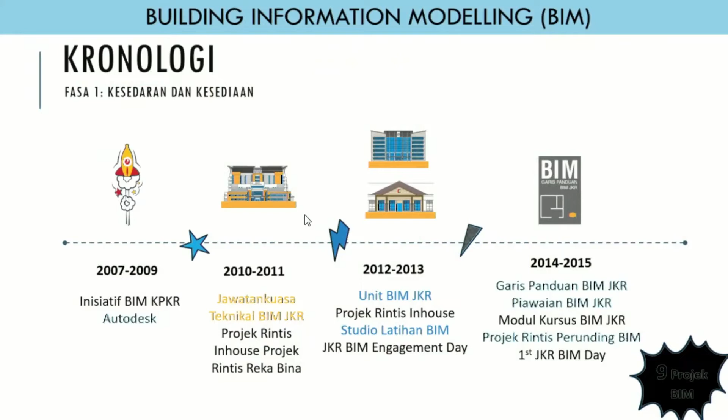So we had a lot of lessons learned in those projects, and from there we came out with our first BIM guideline and BIM standard at JKR, which we already use in all of our JKR projects. And then the next one we call Phase 2.

Phase 1 is actually our awareness and readiness, how we want to implement BIM in JKR projects. For Phase 2, we focus on development and implementation in terms of the process, and then in terms of our people and technology.

So we managed to publish our work process in BIM, and then we developed our competency development for our staff in JKR.

We put our KPI in our JKR strategic plan 2016 until 2020, targeting to achieve 10% for projects worth 50 million and above for building projects. So we targeted and we already achieved 20% for that KPI. So we see that BIM can be done.

So actually BIM can be done if the government pushes the industry. So by 2020 we came up with our policy in BIM, and we have our Surat Arahan KPKR bilangan 18/2020, that we want to implement BIM in all our JKR projects worth 10 million and above.

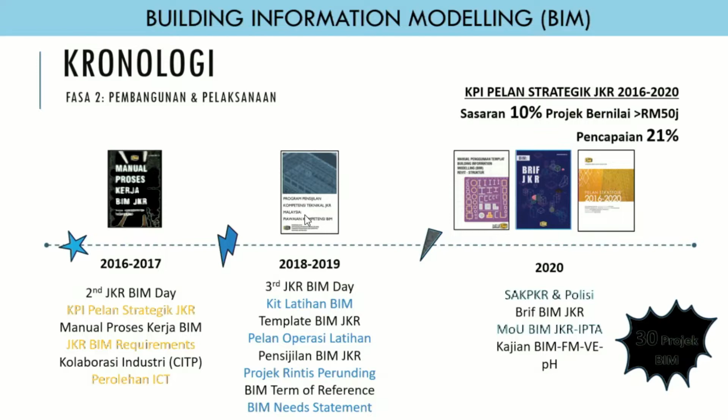For Phase 3, 2021 until 2025, we want to move in and expand BIM use into GIS, prefab and modular coordination such as PPVC, IBS, and then facility management, and sustainability. So we see that starting from BIM, we can move to other technology that can be used during the whole life cycle of our projects.

So until now we have around 85 projects in RMK 12, and there will be more projects that will use BIM in our projects.

So for 2021 until 2025, we targeted 50% of projects worth 10 million and above to use BIM for all JKR projects, and every year we will increment by 10% each year. So that by 2026, all of our projects worth 10 million and above, JKR will use BIM fully. So that's our journey, from non-BIM to BIM.

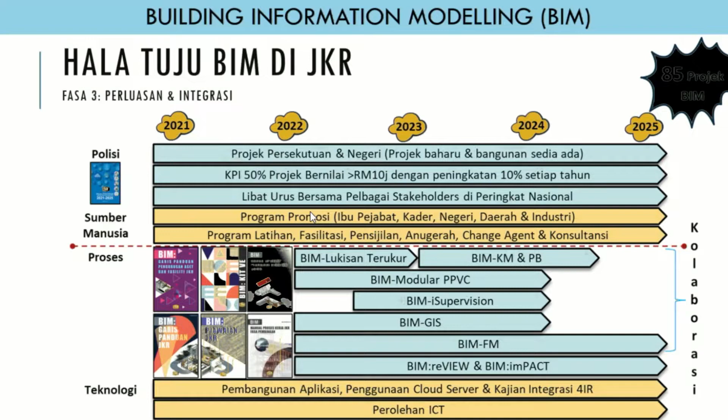We try to bring the technologies such as BIM, FM and so on into our pengurusan aset project and pengurusan aset juga, okay.

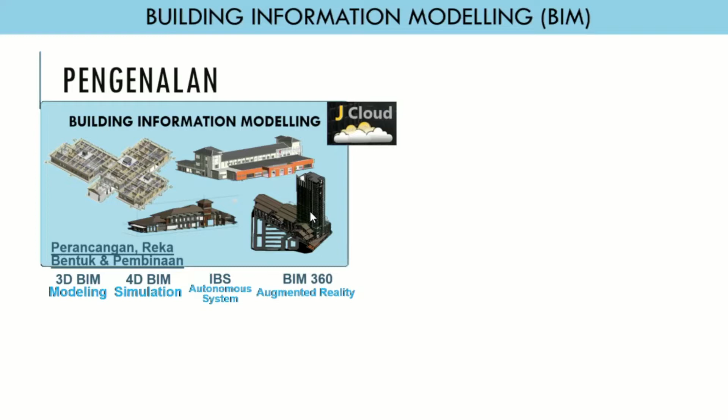So if we talk about BIM, we need to have a sharing platform. In JKR we have JCloud, to share all the data, all the models, to the designers, consultants, and contractors, so that they can share in one platform, one source. So they can coordinate and collaborate with each other by using this platform.

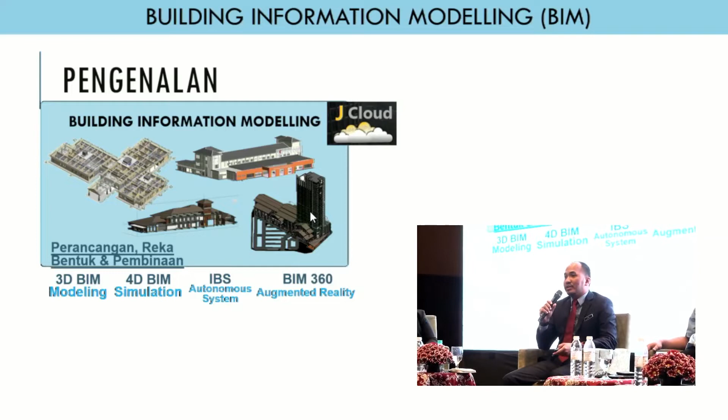After that, all this model we hand over to our clients. So the clients can get the BIM models into our eCOMs. We have another platform that puts all our repository data, where we have all the as-built model, as-built data that the client can get from there.

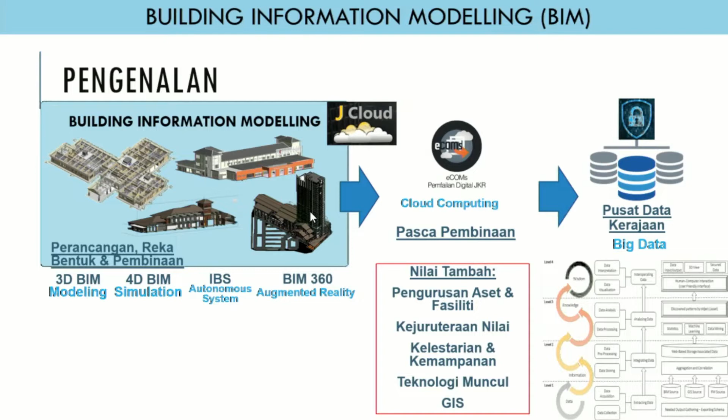So actually BIM can give added value in terms of pengurusan aset, facility, value engineering, sustainability, and emerging technologies and GIS. Actually, BIM can accelerate the adaptation of technology 4.0 because it can improve the work process, it can increase the productivity, and also that can be used for sustainability analysis, amalan hijau, alright.

So JKR from 2020, as I mentioned, we have come up with our policy. Actually JKR is a pioneer to adapt BIM in Malaysia, so that all the industry players can support us if they are doing our projects in BIM. That's why we come up with our initiative. We put, even though we have Surat Arahan KPKR, we also put our JKR strategic plan.

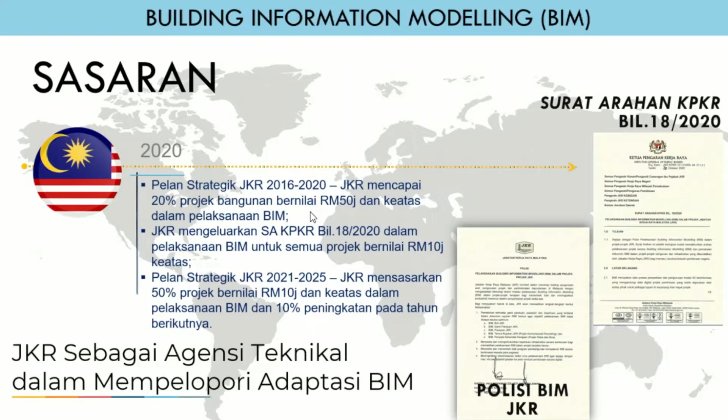So we target, not to implement 100%. We slowly move 50%, 60%, 70% and so on, so that the industry players can catch up on how JKR implements BIM in the projects. Until now we have around more than 120 projects that implement BIM.

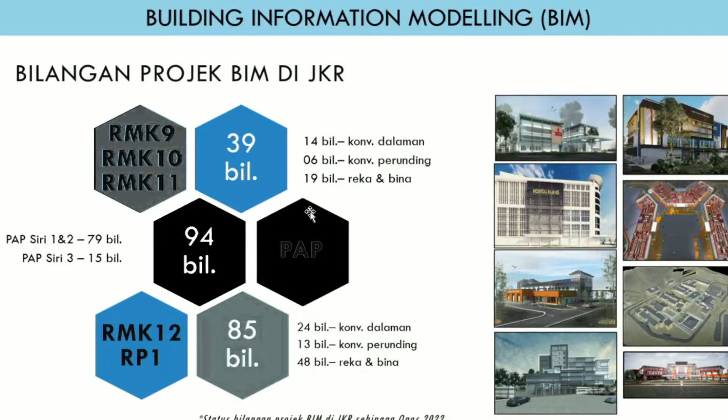We know that when we use BIM, it can help a lot in terms of reducing clashes, increasing collaboration between parties, increasing communications among parties, and giving the best decisions, especially for the client and the designers to come out with the design.

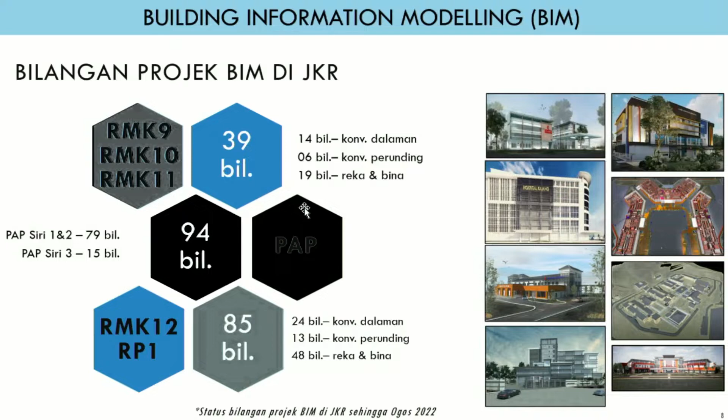And then when we talk about BIM, there are three focus areas that we focus on. The first one is process. We need to develop the work process, the BIM reference documents, so that it can be referenced by the contractors, consultants, and others.

And the second one is technology. Actually the technology is another part that is important that we need to upgrade. We need to invest, to make sure that when we talk about BIM, we need to invest to change the way we work by using the BIM software - that is one example. And then also the ICT also we need to upgrade, so that when we want to share data and models between each other, it can be smooth.

In our work process, and the last one is people. People - actually we need to develop the competency. In JKR we managed to develop our own competency, and not forgetting the contractors and consultants that use BIM - we will try to help them by implementing BIM engagement in the projects.

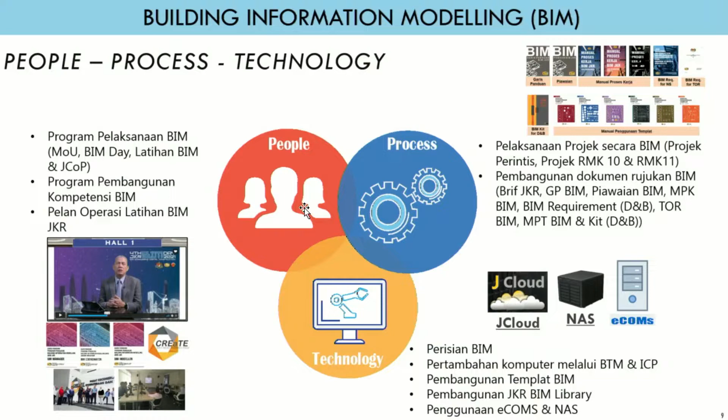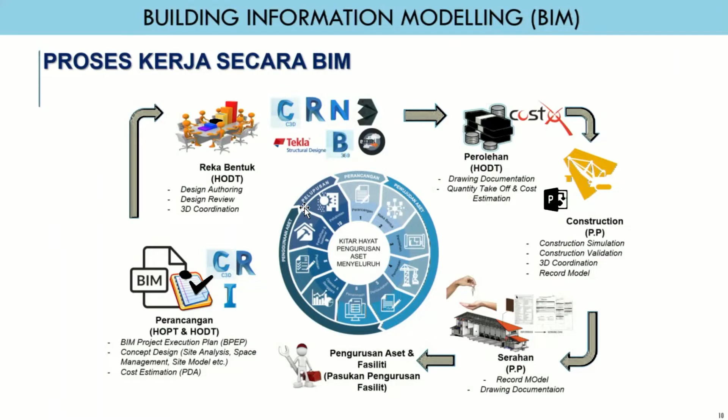So after that, we need to make sure that when we want to adapt BIM, the environment needs to change. Before this we are using only 2D drawings, but when we talk about BIM, we need to change the way we work. We need to have a laptop, a projector or television, so that we can coordinate and communicate with each other, so that we can improve the way we talk and discuss among the clients, designers, and the contractors.

So actually, the design, we build the model, and then the consultant will discuss each other's work. And also in construction, we bring the models onto our tablet. We can validate the construction, and also for the clients, they can see 3D visualizations so that they can comment on it, and then the designer can improve the design from the client's perspective. So this is another example of how we want to share the model.

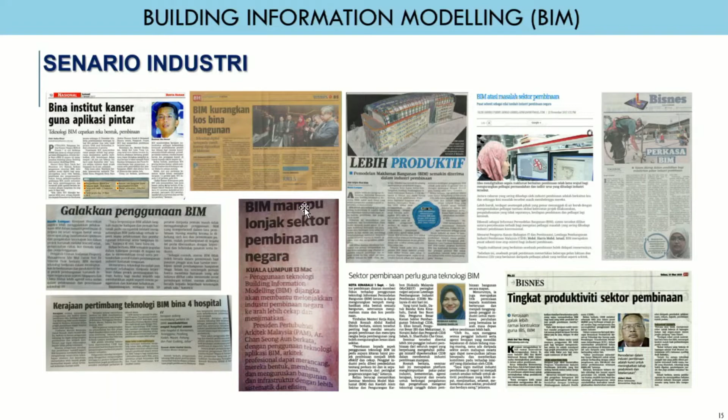What about the world? So actually all around the world BIM is already implemented. If you look at developed and developing countries, BIM is already implemented, especially our neighbor Singapore, who already implemented BIM by 2012 if I'm not mistaken.

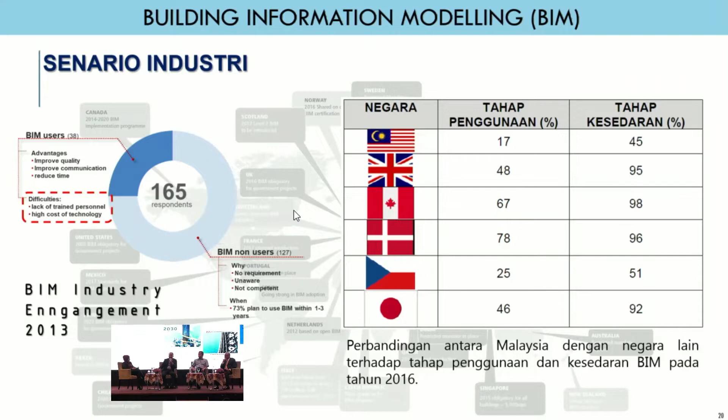One of them is building information modeling. So we know that if we use BIM in our project, it can actually increase productivity.

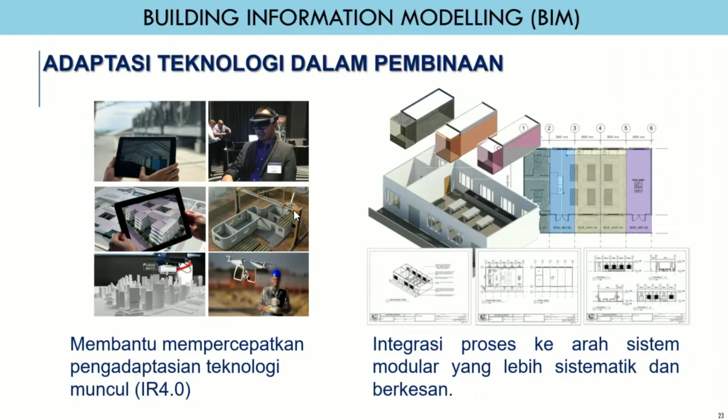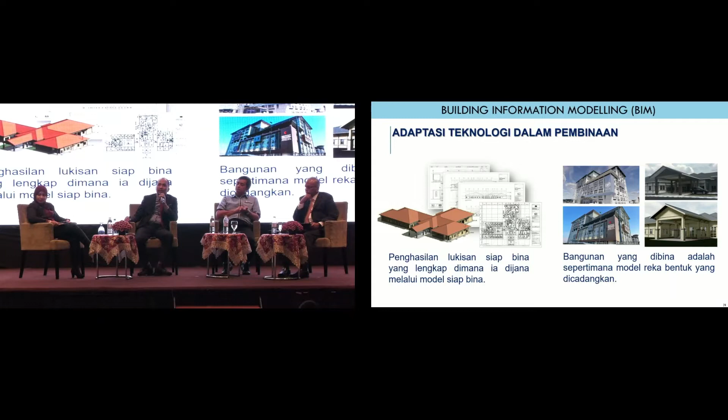When you develop BIM models, we put in all the information for energy efficiency, so we can help analyze the level of energy efficiency. For example, in Malaysia we use MyCREST or JKR's PH JKR, and within that we can get points for using BIM in sustainability analysis.

Other than that, this is the core reason why JKR and the government use BIM in our projects. We want to help register all the immovable assets digitally, because previously it was manual and now we don't want that anymore.

That's why the ultimate goal of using BIM is to have asset information so that our clients can manage all the assets during the operation and maintenance phase.

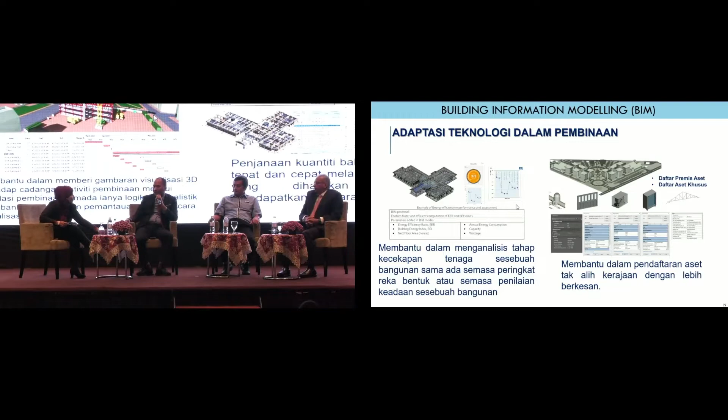In terms of construction, contractors can visualize, combining the 4D with the work program and the 3D model, so they can get activity sequencing during the project. We can also generate the quantities.

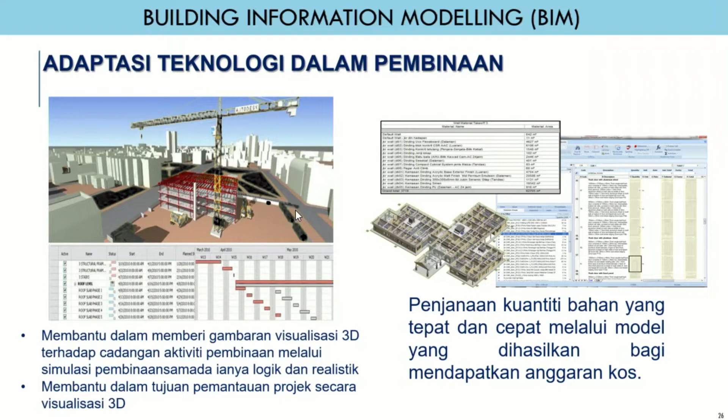So here are some examples of how we work and how we want to present. The first video shows us using Google Meet to discuss with our clients during the pandemic, where we have the models and can discuss among us. The second is the 4D and 5D, where we can look at the sequence of the projects, and the third video shows discussions between the SO, contractors, and consultant during the construction stage.

The fourth video is for VR and AR, which we can actually do, so the client can see things more clearly. We can also upload into our tablet to validate or put in an RFI, so we can get information during the construction stage. So this is how we want to change the way we work in JKR, among our designers, consultants, and contractors.

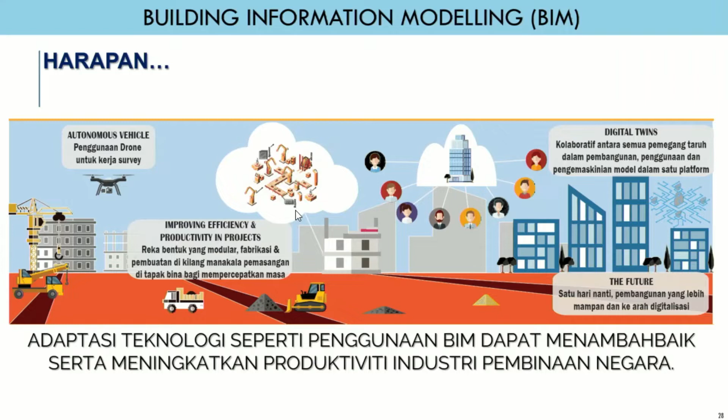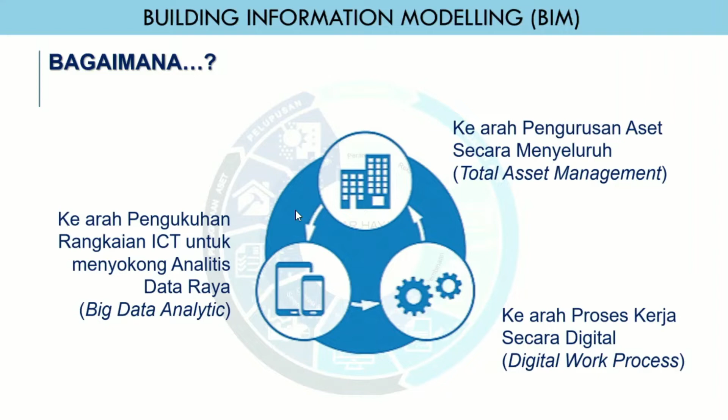Okay, we want to move to level 3. Right now we are in level 2 actually. So if we want level 3, we need to have a seamless process, and all of us need to use the technology. So that's I hope that from my presentation, it can give you all some glimpse of adapting technology, by using BIM in the projects, so that we can increase the productivity in our industry, construction industry. So there are 3 main things. We need to go into total asset management, digital work process, and big data analytics. So that's from me.

Thank you so much, Engineer Faiz, for very insightful information. Maybe I think industry would like to know what actually JKR Unit BIM can serve them. Looking into the whole initiative, how actually JKR can help industry perhaps, because you do have lots of projects, lot of involvement. So maybe you can share a bit, sir?

In terms of initiative, actually in our plan strategy JKR 2021-2025, one of our initiatives is to implement BIM. 50% of projects worth 10 million and above. So that is the first one. So that when the contractor or consultant does the project for JKR, they need to use BIM. So that is the first initiative.

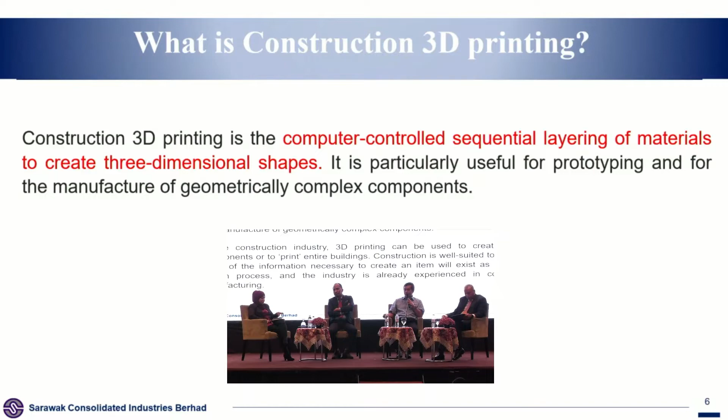So in construction industry, 3D printing can be used to create so many types of structures. It is unlimited, whatever shape you can think of, especially architects, they are very innovative and have interesting ideas, because being so many years as engineers dealing with architects, they have so many crazy ideas that we engineers have to suit. So now we have a solution. Even as contractors, we can suit the needs of architects, especially because architects would like to have beautiful structures, not a dull structure. So 3D printing is one way where we can help make that a reality.

And at the same time, as contractors or even as developers of the machine, we also look into costs. So cost always goes hand in hand with the design. That's why I always say, are we ready, before we come to the conclusion to buy this machine.

We did quite a bit of research before the pandemic. Actually right before the pandemic, I still remember we went to China, in 2019, to look at the 3D machine. At first we went to China, then we went to Europe, to compare the 3D printing machines.

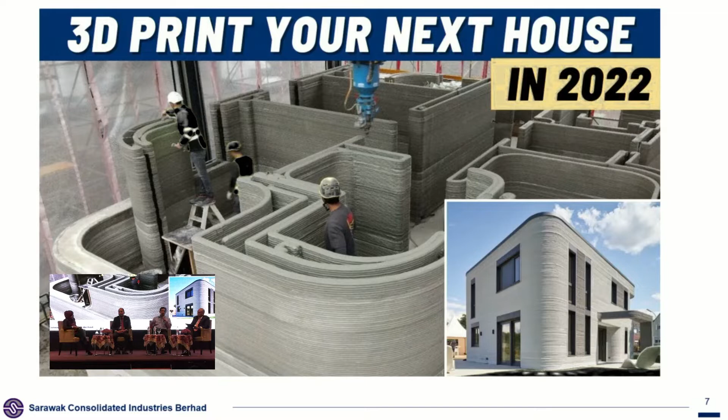So are we ready for 3D printing in 2022? We started to look at the machine and started to buy in 2021. And from there we do our own research on so many things. So later on, I will share with you in detail.

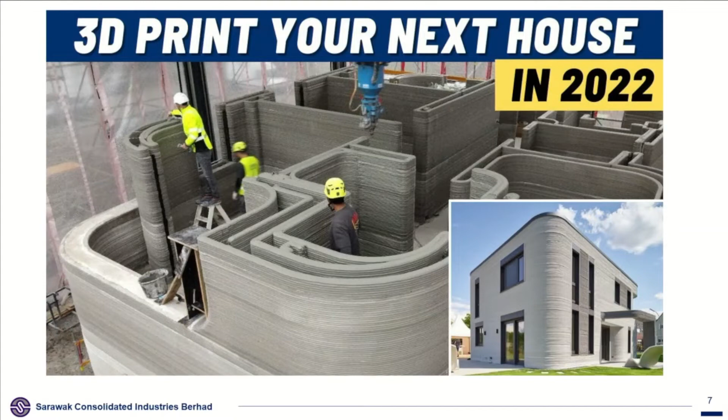The innovation in 3D technology is actually like our own printer that you use every day in your office, in your schools - 3D printing. I know architects have 3D printers, we call it 3D printer, small one, not the big one. So in construction, we are talking about 3D printing of big scale. Normally, architects when they do design print, their design is 1 to 10 scale or 1 to 100. But for us contractors, developers or builders, when we build using 3D printing, we are building 1 to 1 scale - meaning we are building the actual size of the building, not using pen or ink, but using concrete. So that's what we call 3D printing in the construction industry.

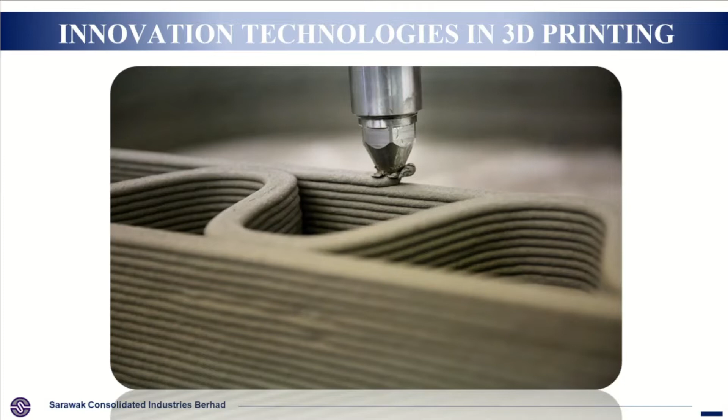So the machine that we bought, finally we decided to choose the Cobod machine, 3D printing machine from Denmark.

This 3D printing actually started in Europe, and one of the pioneers is found in Copenhagen, Denmark - a very nice country. They founded the company in 2017. This Cobod is a globally leading company who champion 3D printing technologies, and it is funded by the government of Denmark.

So from there, they started with 35 3D constructions using the first model, that is BOD1. Upon that construction, they researched and made many tweaks in improving the machine, and that's where they came up with this second generation machine, which we call BOD2. So BOD2 is where we, SCIB, Sarawak Consolidated Industries, decided to purchase one to do our own 3D printing here in Malaysia. It's newly upgraded and much improved from the earlier version of BOD1.

Okay, so if you can see in the slide there, these two photos - actually 3D printing is a very simple structure, but the technology is in the software itself and also the materials.

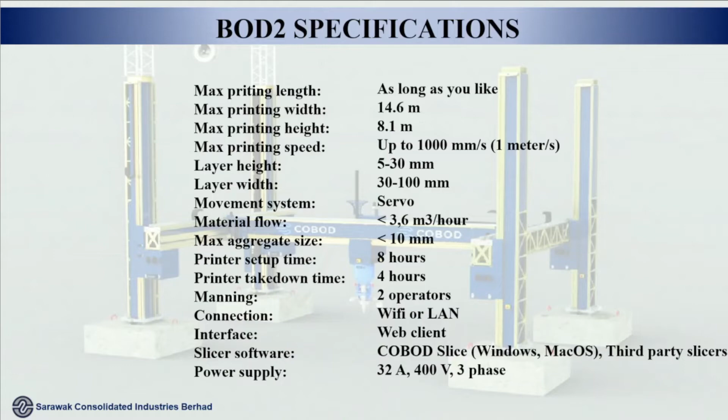The layer height of the material is actually a module, it can be adjusted depending on the design and also the design mix - I won't go into so much detail there. But the most important thing is that the software we use is a slicer software. This is the technology we learn when we operate the 3D printing machine.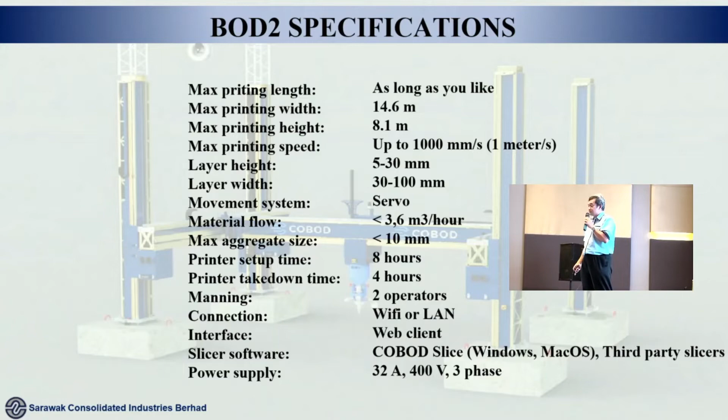The innovation of this technology is that they're using a gantry arm extrusion system as the printer, where they can control the printing from all the inputs that you design, because it all starts from your design office. You can use any design software - AutoCAD, Revit, whatever architects use, any software. The output of this software is input into the machine, where we have software that computes the slicing of the house. Imagine it's like making Sarawak cake lapis - you know that cake, there's a lot of small layers. Likewise, when you design a house, the software will compute all the slicing.

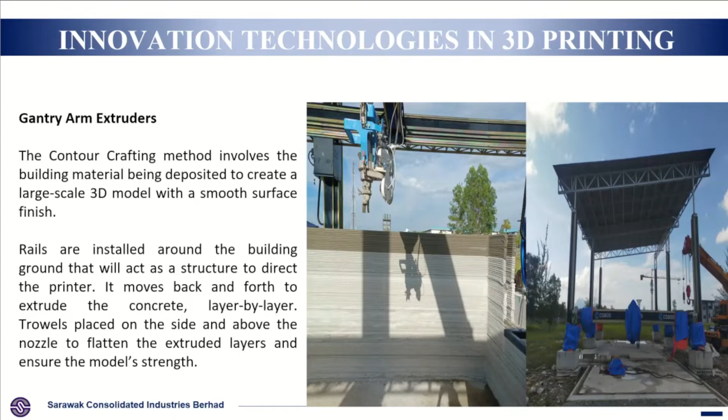So the printer will print upon the slicing, and you'll understand more when I show you the video. The precision of this 3D printing is absolute, meaning it can print layer by layer upon every millimeter. So how many slices that can be generated is how many printing lines it will generate to form the completed structure from ground zero to the finishing level of the intended structure.

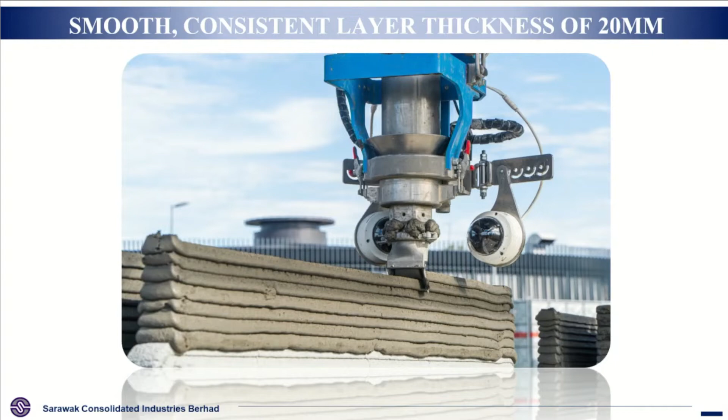We are using Cobod slicing software, and because it's technology 4.0, I call it now, the concrete is extruded by this beautiful printing head. For every printer, the most expensive part is the ink, the printer head. So this is our printer head for the Cobod machine. It's a printer that extrudes the amount of concrete, or in this case structural mortar, to form the structural building of the houses.

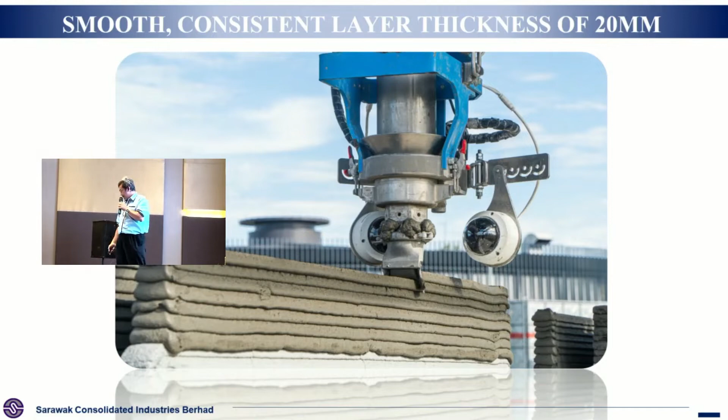Setting up this machine is actually very simple, and in fact, when we bought this machine, the Cobod engineer from Denmark was supposed to fly in, but because of the pandemic, we had to learn virtually. Because of the time difference, we worked at night to learn this machine. It took us about almost two months to familiarize ourselves with the mechanical and electrical parts.

And of course, being a printer, there are a lot of sensors. But when you maintain it properly, any machine's electronic sensors are always the part you have to look after to make sure the machine works perfectly. The maximum setting up time is actually 8 hours to set up the machine.

Now, for a printer, the most important thing is the ink. In our construction 3D printing, our ink is actually the design mix. It took us almost 3 months to understand a suitable design mix for our local raw materials. Even though the material is simple, cement or sand, there's a certain design mix you have to develop, because mind you, there's no standard for how to generate this design mix.

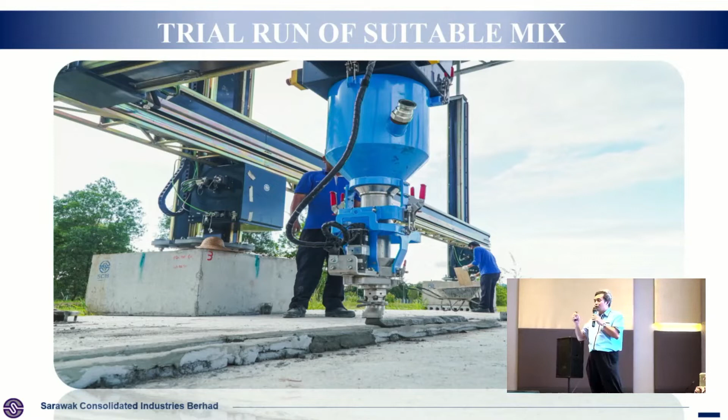It's not like a normal concrete where you have a 1 to 2, 4 or 1 to 2, 2 dry mix. For this, the trick of this mortar mix is it has to harden quickly, but not too quick and not too slow, so that we can sustain the thickness and the height of the material.

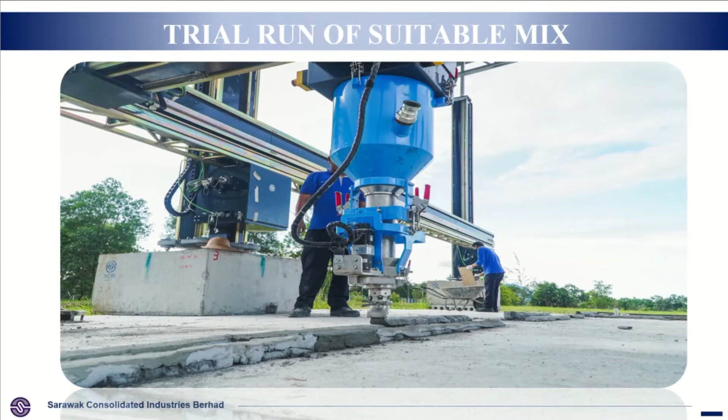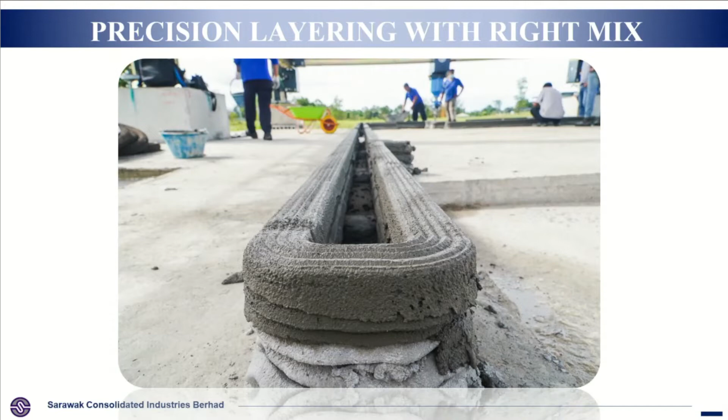Once you get the correct design mix, the printing is very precise. If you design the width of the printer line, I call it the slicing line, the standard width is about 50 to 65 mm. So the nozzle is extruding a minimum of 50 mm to 65 mm wide of concrete mix continuously, so you can have a very beautiful profile.

This profile is actually to create the shear interaction. Those of you who are structural engineers know the importance of this shear interaction to have a strong and stable wall when we print.

So an important aspect of the material is that it has to be a fast-setting design, enabling the concrete to be printed at high wall thickness and high wall height. The design mix has to be perfect, which is why it took us 3 months to study it. We learned this design mix together with our local concrete industry, and once launched, we are now sitting together with CIDB CREAM, the research body, to form a standard for 3D printing in Malaysia, so that everyone follows the same standard which complies with our local building authority.

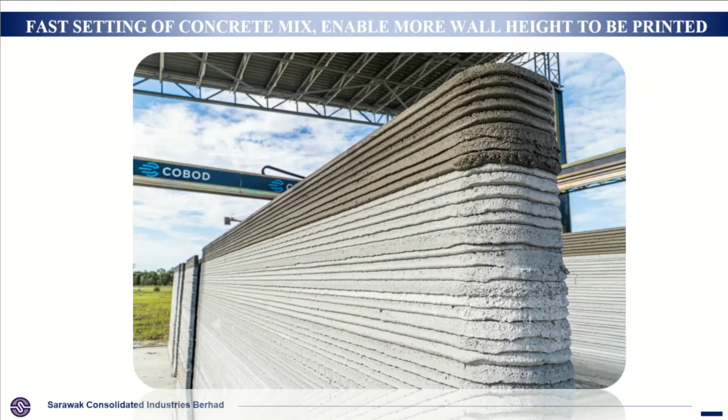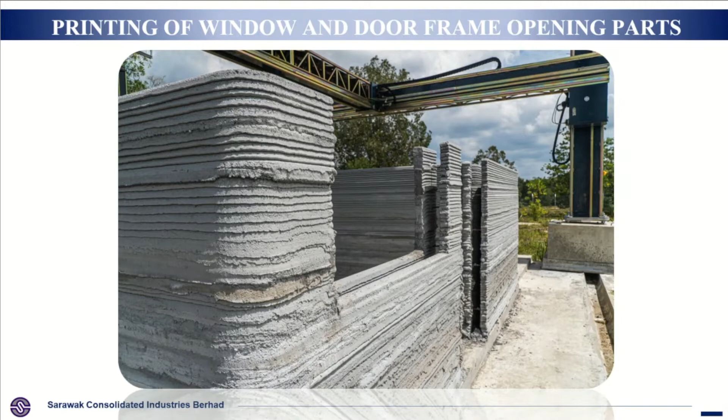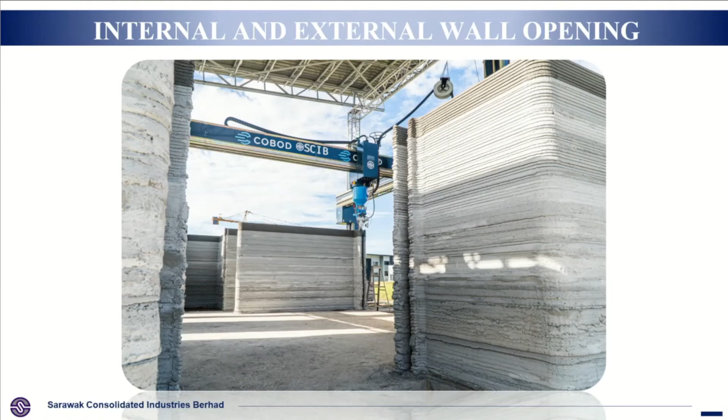This printing can even print all the structures of the houses, especially openings for doors and windows. These are all photos we took where we actually printed the actual building from ground to finish. You can see a big door opening, and even the lintel, the opening of the window lintel or door lintel, can be printed. But of course, when you have a lintel, we have to do formwork to form it.

So the lintel is also using extrusion 3D printing. In these houses, when you use 3D printing, there's no formwork involved, only formwork to do the lintel.

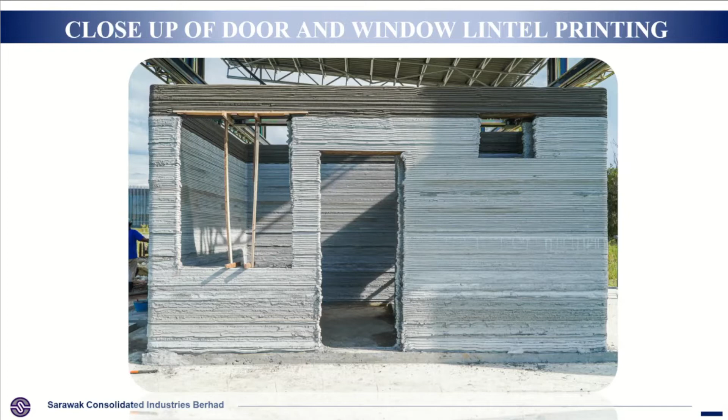Okay, so this is another photo to show how you actually prop the opening of the window or door. So there's no limitation of size. Whatever you design in your building, the opening, or even your M&E, is all precisely located. So whatever you input in your design, where's the location of your opening, conduit, power box, services, is all captured. And the printer, once you input the data to print, you print everything precisely. You only need to put the socket box.

Or even on your left, you can see M&E. You know the conventional type, when we do M&E, we always grind and cut the wall. So in this process, there's no cutting. You only install the piping on it. This goes the same with plumbing, your water.

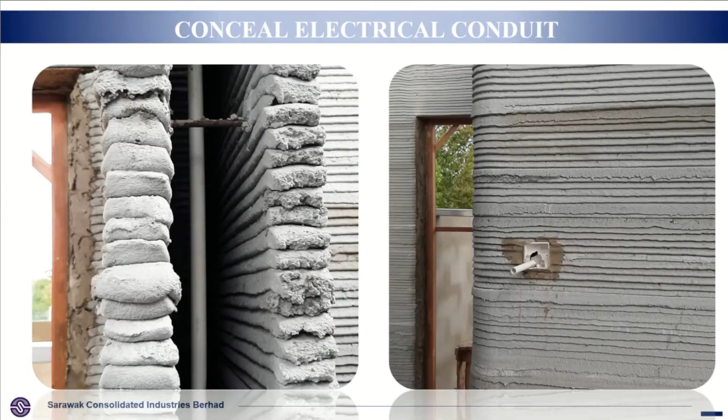So in 2 days we can print. This is the actual site. The location of this site is in CIDB Sarawak, one of just nearby the convention center. So in 2 days we can print about 1 meter high of wall height.

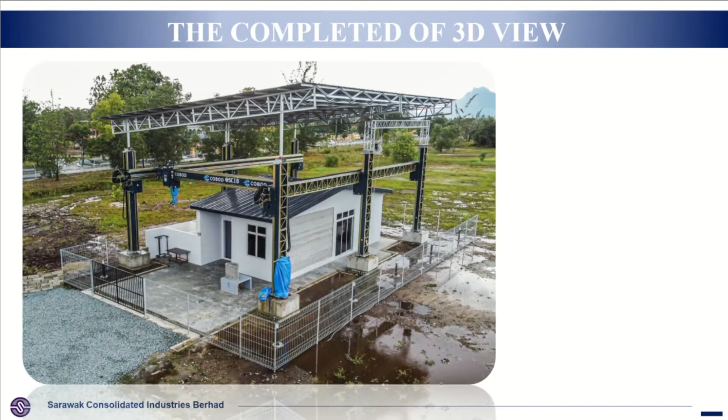So the completed 3D view, this is upon completion. A summary of the printing: there are total 145 layers of materials, where each layer is about 20 mm. So the total print of this house is 46 hours, with a total length printed of 9,196 meters, about 9 kilometers, with maximum 20 layers per day printing. The average mortar strength, structural mortar strength at 28 days, is about 25 MPa average, and it can go as high as 30.

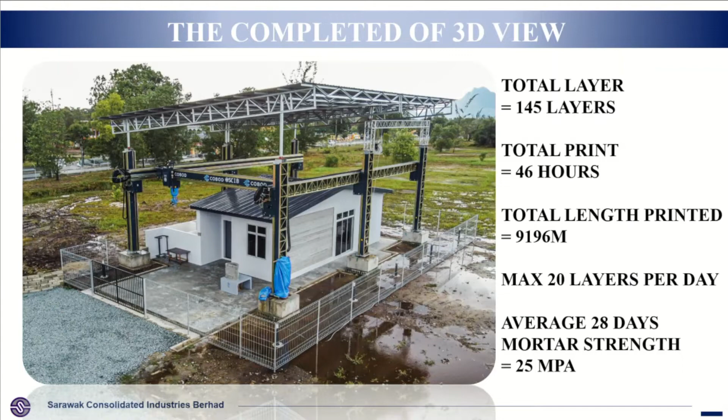Okay, so what is the benefit of this 3D printing construction? What I can summarize is it's efficient because maximum printing speed is 1 meter per second, and the machine produces less waste, there's no wastage. Whatever you input into the machine is translated into your product. Also, 3D printers can finish a home structure in less than a few days.

Like for instance, this 46 hours of printing, of course it's not continuous. The actual 46 hours is actually translated into close to 14 days, because every day we don't print from morning until night, because we are actually studying. But if we really want to print continuously, maybe it will take about 3 days to complete everything.

Okay, and also it reduces the labor costs. Why? Because only 2 operators are needed to operate this machine for construction. Construction with 3D printing may allow faster and more accurate construction, especially for complex structures, as well as lowering all the labor costs and producing less waste.

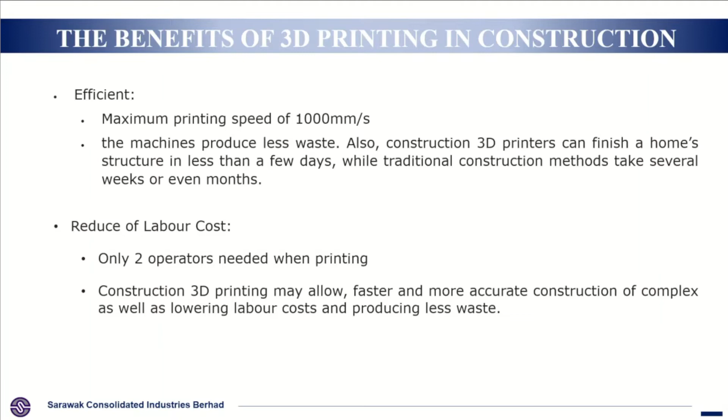Okay, so it reduces construction waste. Why? Because the walls are printed straight. Unlike conventional construction, when you do walls, they're not straight, they're wavy. So once wavy, there's plastering involved, where some part may be thicker, some part may be thinner. But in this case, because it's 3D printing, everything is precise, so it reduces the amount of plastering. In fact, the printing of the wall is so nice, like kek lapis. Some house owners may even like to maintain it without plastering, just plastering the inside of the house because of dust. But externally, it looks like a fair-finished concrete structure, and there's a design to it.

So it can actually also reduce site formwork. In fact, in this construction, we hardly use any formwork. And because of that, it's a much cleaner and safer site to work with.

Okay, and the design is very flexible. In fact, a house normally, when we look at a house, it's normally boxy, square, 90-degree angles. But you can in fact design a house with a curved wall, because printing can be done curved. If we want to do it conventionally, the formwork would have to be curved, and of course that's a cost. But for this, there's no extra cost. The cost is only the machine and the time. That's why it's a faster construction time, and it's proven when we do the actual construction.

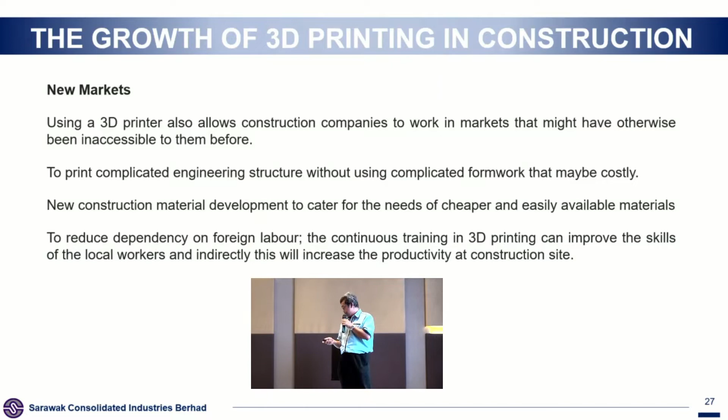And new construction materials will be able to develop. In fact, we are now in the midst of collaborating with universities to come out with a much more efficient construction material, especially for the concrete ink, as I call it. So a better design mix, because I always believe concrete can always be improved. The way we go forward to improve is to reduce the cost of construction and improve durability, and make it easy to control the design mix that reflects our local materials.

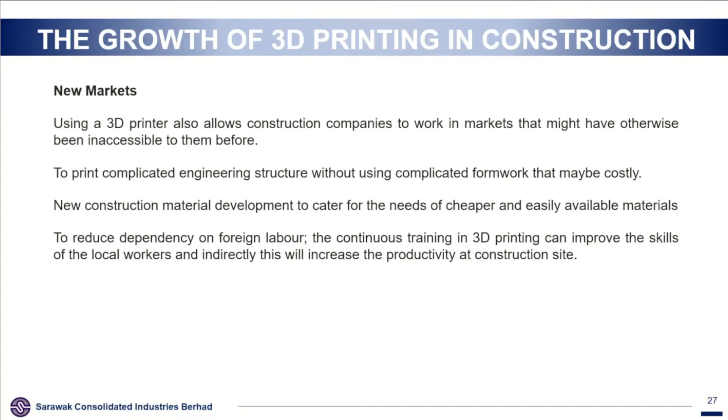And also with 3D printing, because of the experience of the pandemic, we can actually reduce the dependency on foreign workers. Not only foreign workers, but when we have shortages of workers, especially in our construction industry, this 3D printing is one of the ways that can help improve our shortages. In fact, it can help develop more skilled labor to work with this 3D printing, and with that, it can help increase the productivity of construction as opposed to our conventional labor force.

Okay, so I end my slide here with the actual video that we took for the construction of our 3D printing project. So in the first few minutes, you'll see how we set up the machine, and then how the machine prints the structures.

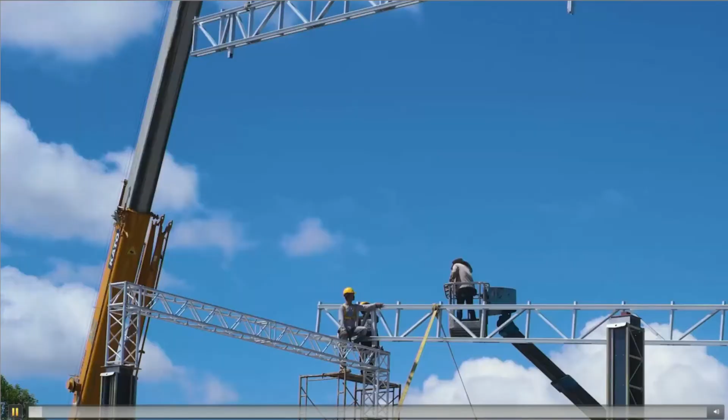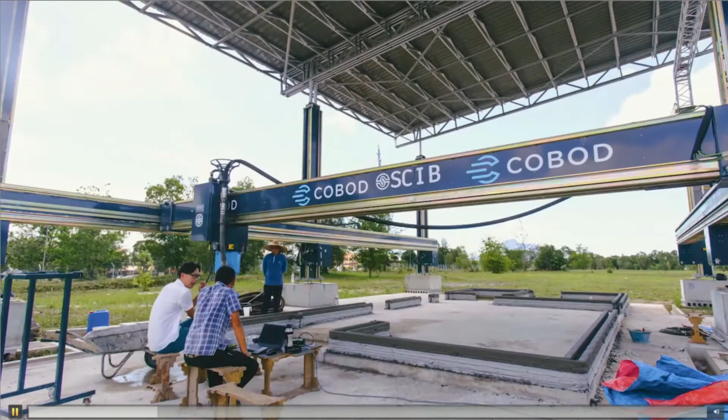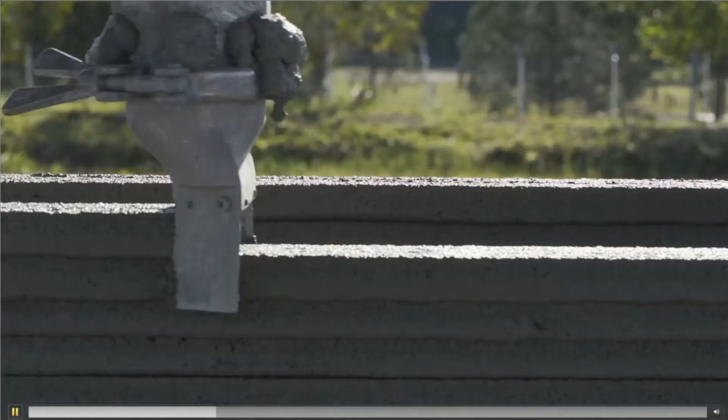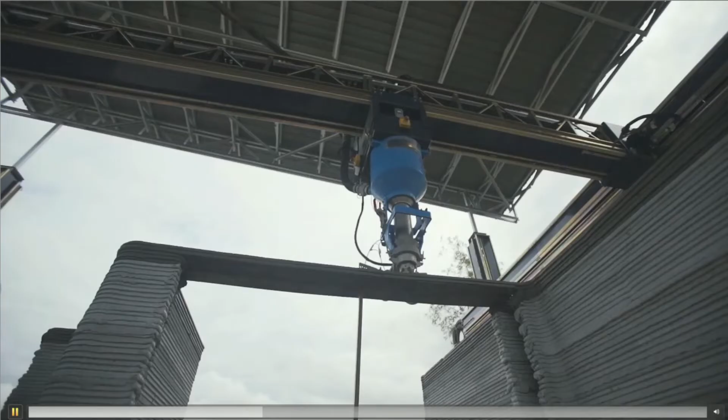The success of this 3D printing very much depends on the design mix, so it took us quite a fair amount of time to learn to perfect it. You can see the uniform extrusion of concrete by the printer, and whenever there's an opening, it knows where to stop, where to turn, and where to go.

Once you press the button, it's automatic print. Once your design is finalized, everything is left to the printer to finish the work. That's how easy it is to print a house. Nothing is impossible. Everything is possible when you do the design properly.

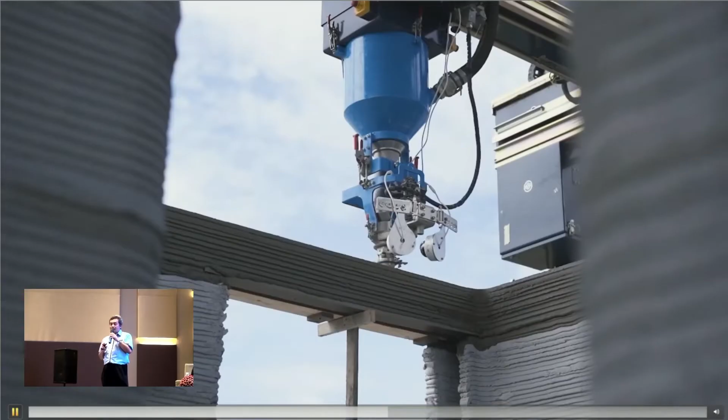And as I mentioned, you can think of any structures, beautiful structures, curved structures, especially curved buildings, or even a dome, can be printed using this 3D printing.

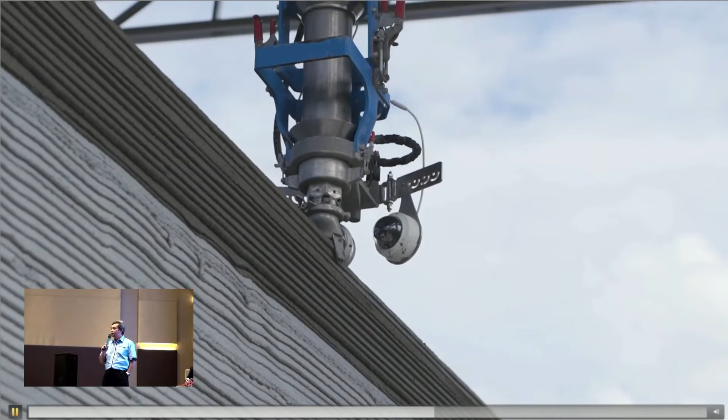We hope to use this for all the houses, especially for affordable housing. Finishing of the building is like many other works. That's why we purposely left some part of the wall unplastered to showcase the beauty of the concrete printing.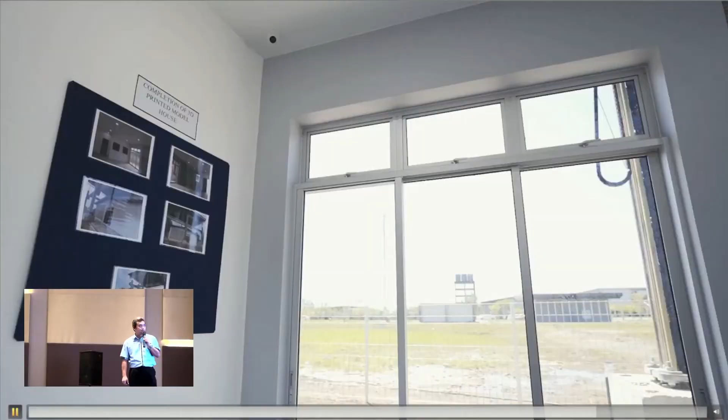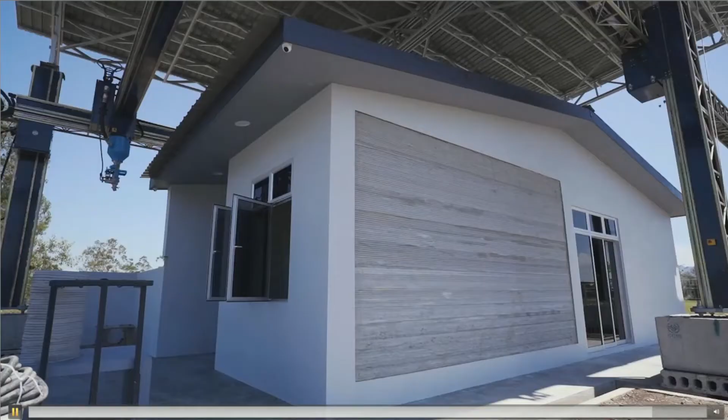It's a 3-bedroom, 2-bathroom house, about 850 square feet, completed in 46 hours. This will help to reduce costs and also help address the shortage of houses in Malaysia.

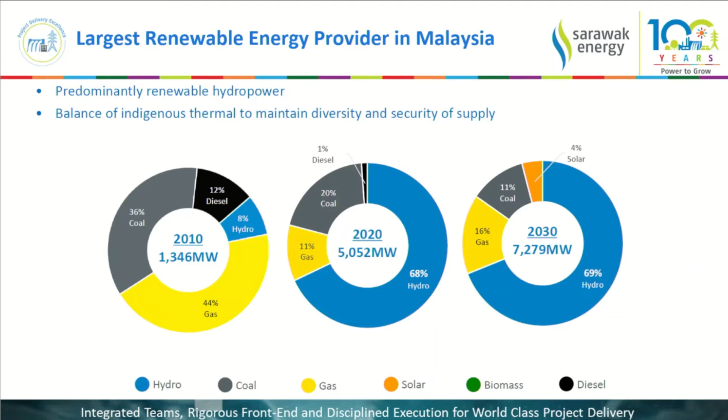I'll now talk about our capital project portfolio. Today we have about 40 billion ringgit worth of projects. It is large by any standard because it is infrastructure development, to be implemented by 2030. About 29 billion of this is generation projects and 11 billion is for transmission projects. Slightly more than half is now in the execution phase, and the remaining is in the front-end design and development phase.

The large size of this capital investment is quite typical for major infrastructure development projects, and it's all the more important that in executing these projects we embrace technologies and best practices to implement them cost-effectively, timely, and safely. From past experience of project execution, we have seen significant cost escalations and delays, which can have very severe negative impact on the development of the state and the rakyat. In our internal analysis of some 50 projects executed between 2010 and 2018, we saw delays averaging about 1.5 years per project, with the worst case delay of up to 6 years, and cost escalation of up to 1 billion ringgit. When you have delays, it's cost.

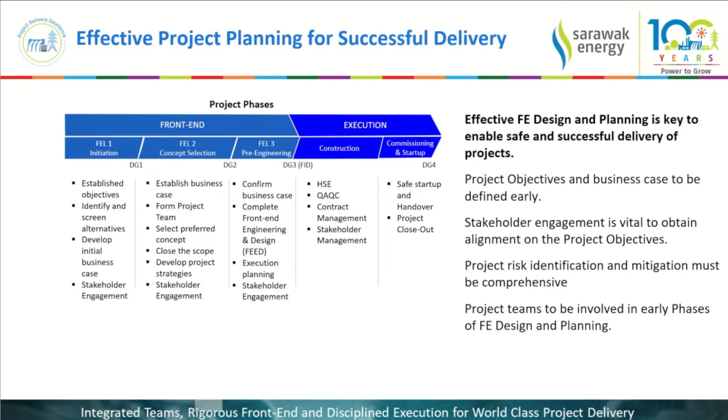For instance, we have transitioned from literally drawing a straight line on a map to using topographical maps and cadastral maps to aid in determining optimal line routes that are technically less challenging, and that also help minimize disruptions due to disputes by land claimants.

It's a simple thing - when you draw a straight line on a piece of land, you cut through it, and the way you cut through the land is so disruptive that it becomes useless. But we could alternatively use a cadastral map and follow the boundaries of the land in order to minimize the disruption.

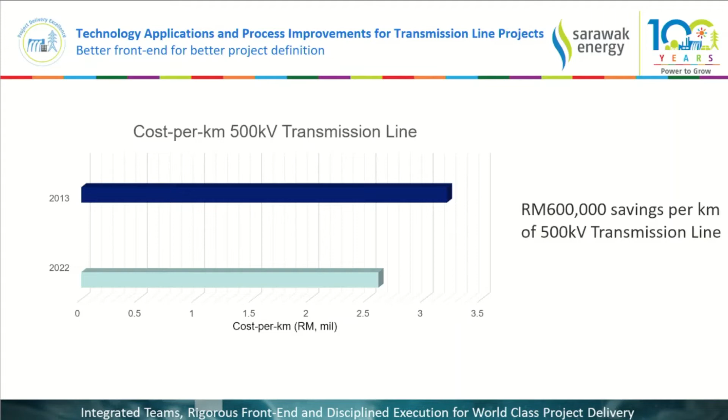Now, I'll touch on the application of disruptive technologies within SEB now. I'd like to start with construction management.

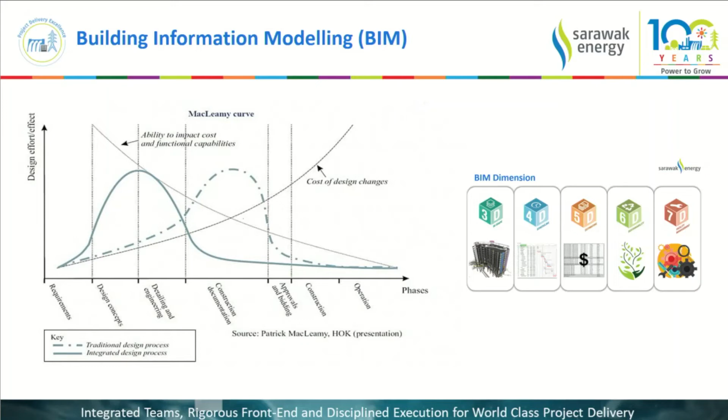The image on the left illustrates that the ability to impact cost is highest at the early phase of the project. This basically means that if you do your planning right, you'll be able to impact costs more significantly if done early on in the life of the project. Whereas the cost of design changes increases as we delay the planning phases to a later stage of the project life cycle. BIM, of course, provides value in facilitating early design to minimize changes during implementation, and as we all know, changes during implementation result in cost and schedule impact.

Instead of in situ foundation construction, which is very laborious and involves managing many safety risks, the foundations are fabricated in a prefab location where quality and safety aspects can be consistently and more effectively managed. These prefab foundations, weighing only about 3 to 4 tons, can be easily transported and installed safely onto pre-prepared lean concrete bases, after which earth is backfilled to the required levels for support and strength. The contractor has already utilized these techniques successfully in Georgia, USA, and Papua New Guinea, and SEB is exploring the use of the same in some of the more challenging project locations. If successfully applied, we can adopt this technique as a standard for all future projects.

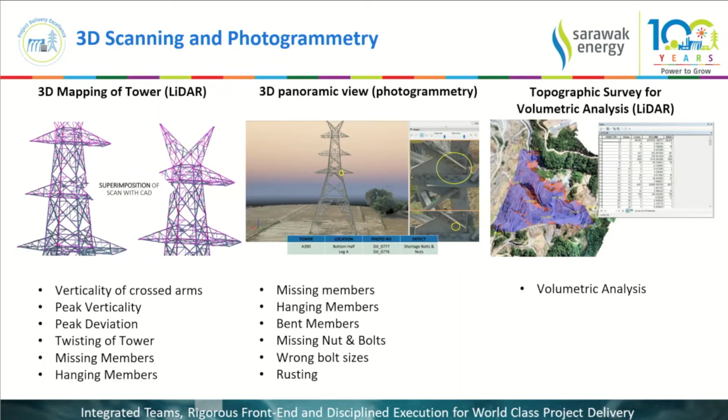With regards to advances in data-driven project management, cloud and real-time collaboration has been introduced in Sarawak Energy many years ago. In fact, I think the benefit of having done this early, along with the integration of ECM and EDM systems, the extensive use of Office 365 suite of applications and multiple other online applications for processing of staff claims, human resource management, and procurement and others, has been significant.

We have also experienced firsthand the benefit of this technology when the MCO was implemented in 2020, arising from the pandemic. The organization was able to very quickly transition into virtual workspaces with very little or no delay, and has performed very effectively with minimal teething problems throughout the pandemic.

We are also harnessing the benefits of cloud and real-time collaboration, which extends further into all areas of project management, allowing digitalization of many processes, including project controls, performance management, contracts and procurement, central engineering, health and safety, and environment management in all our project portfolios.

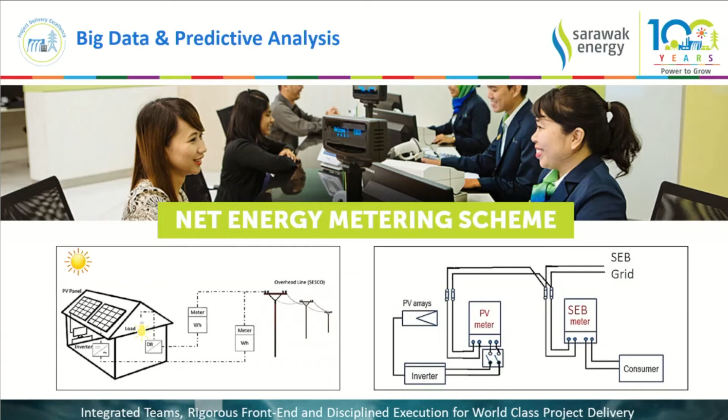Okay, there is one slide I missed. This is just to conclude, and basically the technologies arising from IR 4.0 are playing a significant role in helping us carry out our major capital projects much more efficiently, more cost effectively.

You had difficulty hearing just now? Sorry, was it too bad?

Okay, and on top of that, we will definitely continue to explore the application of a lot of these technologies and also the emerging technologies, and hopefully we can do that in an expeditious manner in order to benefit from the cost and schedule and safety benefits that would be possible through the use of these technologies. With that, thank you very much.